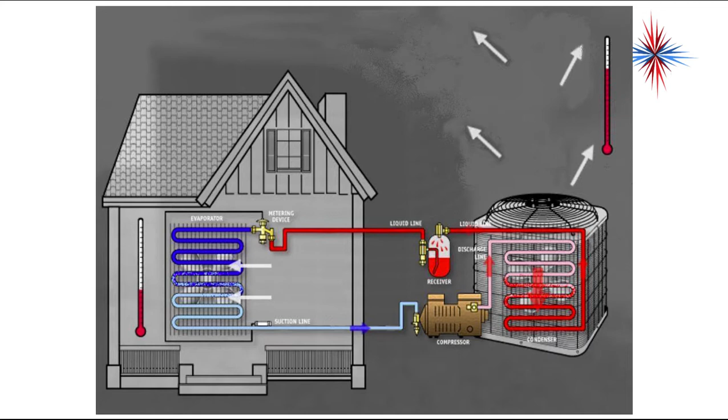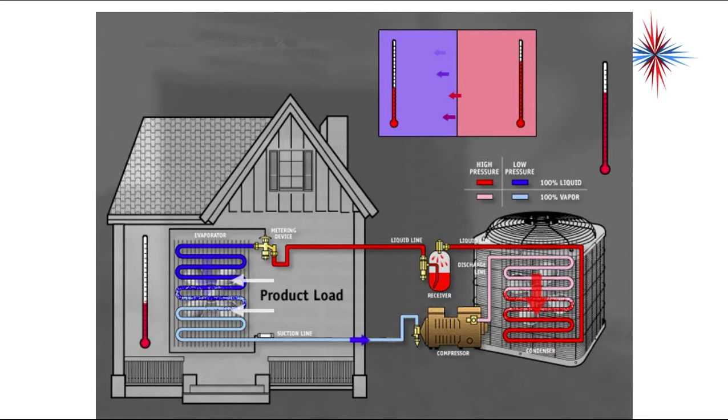This picture shows a split system air conditioning system, but the same principles apply in refrigeration. We have the load from inside the house, and the load out to ambient. In refrigeration, we could have product load in a cooler. Heat always flows naturally from hot to cold. With refrigeration, we're using compressors, temperatures, and pressures to reverse that flow.

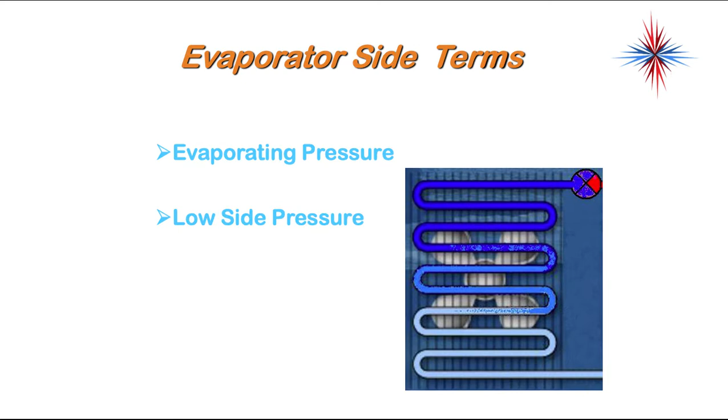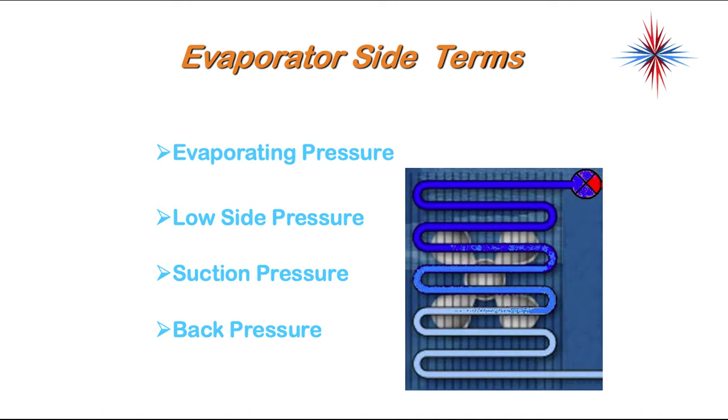On the evaporator, we have evaporating pressure, low side pressure, suction pressure, and back pressure. All 4 of these terms are interchangeable to describe the low pressure side of the system. On the condenser, the high side, we have condensing pressure, head pressure, high side pressure, and discharge pressure. All 4 of those terms could be used to describe the pressures on the high side of the system.

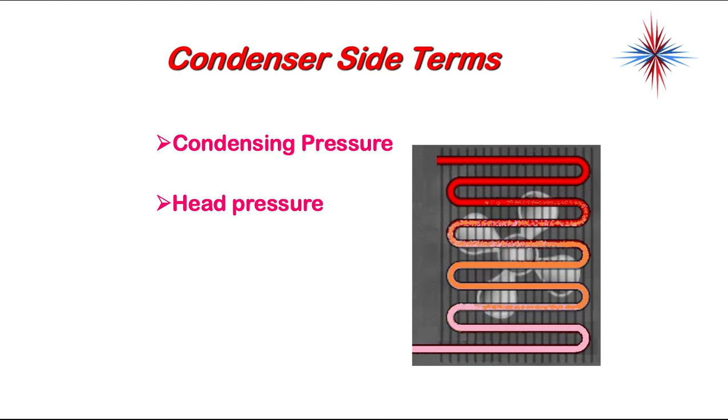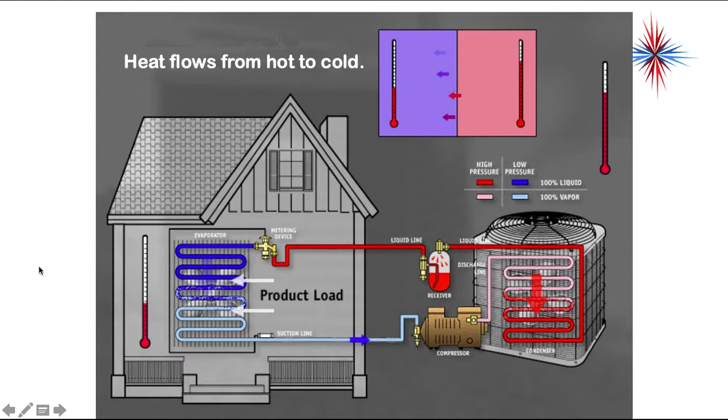Now, it's very important to note that the 2 points of pressure change are the metering device and the compressor. When we're talking about the low side of the system, you can draw an imaginary line between the metering device and the compressor. Everything on the evaporator side, all those pressures should be the same. Everything on the condenser side, all those pressures should be the same. The condenser side is high pressure, the evaporator side is low pressure. No matter where you go in that system, the pressure should be relatively the same.

The compressor is the heart of the system, which circulates the refrigerant. It creates the pressure difference necessary between the low and high side of the system. The compressor raises the pressure and temperature of the refrigerant vapor above the ambient and surrounding temperature. So when we raise that pressure and temperature of the refrigerant above the outside temperature, now the natural flow of heat moves from inside the refrigerant to outside, because heat will always move from high temperatures to lower temperatures. We're raising that refrigerant temperature over the temperature that is outside.

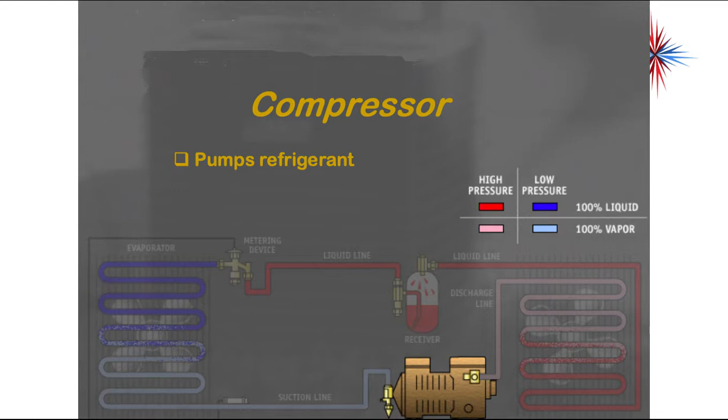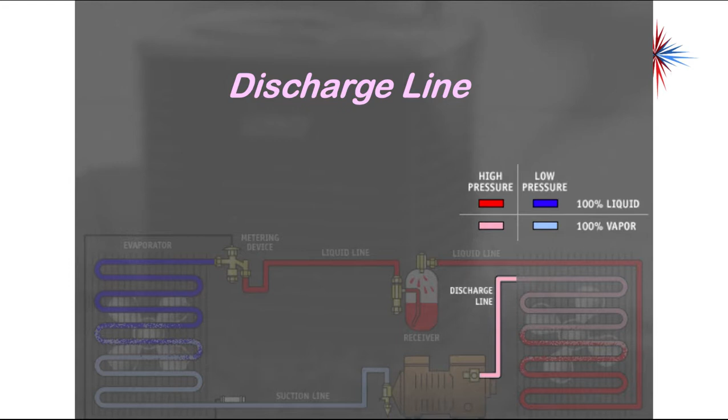Now, compressors are vapor pump only. Liquid refrigerant can damage or disable the compressor. You should never have liquid in a compressor. So again, it pumps vapor refrigerant only and divides the low and the high side. Coming out of the compressor, we have a discharge line. The discharge line is 100% high pressure vapor, and it connects the compressor to the condenser.

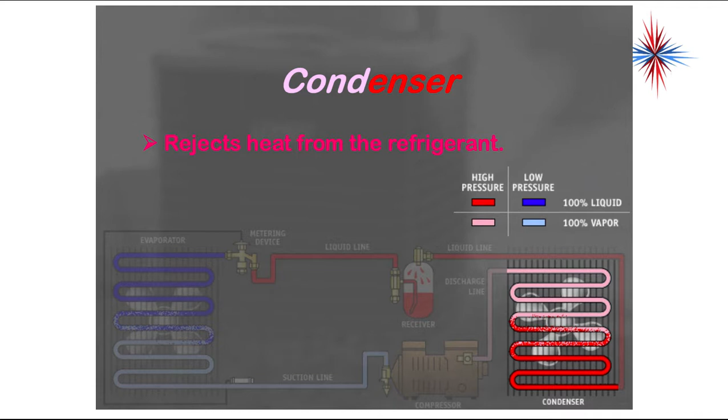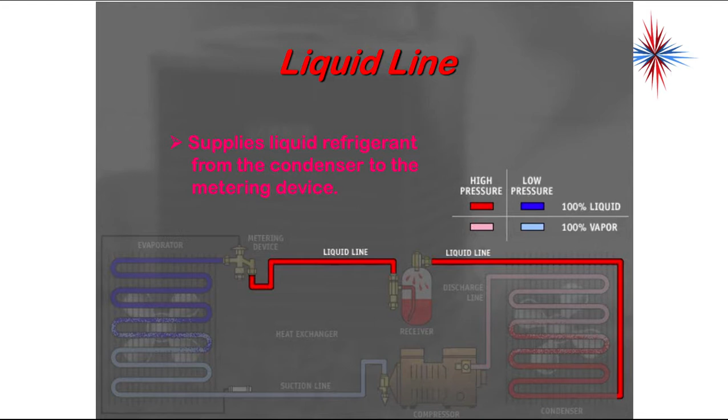The condenser rejects heat from the refrigerant because the temperature and pressures are higher than the temperature of the surrounding outside air. The heat will come out of the refrigerant and be rejected to the outside environment. Out of the condenser, we have the liquid line, which supplies liquid refrigerant from the condenser to the metering device, and it should be liquid. If we're sending anything other than liquid refrigerant to that metering device, we may have a problem someplace in the system. The metering device controls the flow of refrigerant and divides the low and high sides of the system.

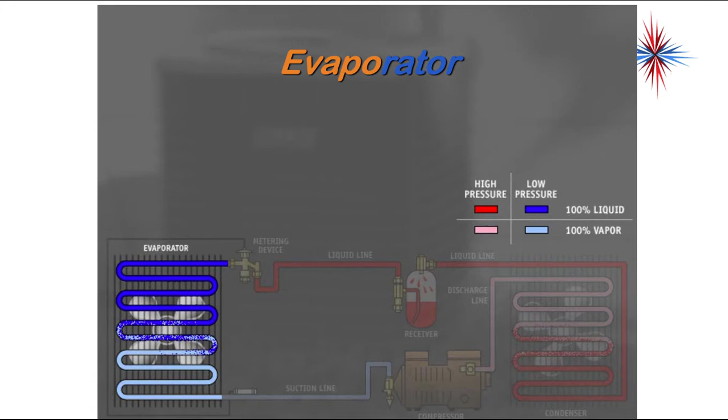So again, this is my second point of pressure change. My first point of pressure change is the compressor. My second point of pressure change is the metering device.

Think of the metering device as you're putting your finger over the end of a garden hose. Everything on the garden hose side is liquid. Everything coming out from the metering device is a low pressure spray. In the trade this is known as flash gas.

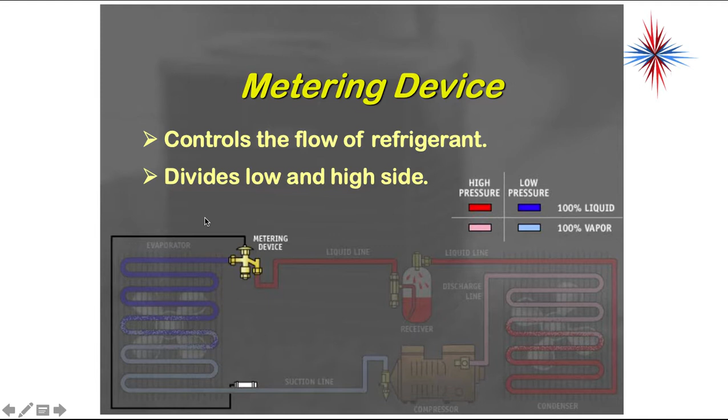So liquid comes into the liquid line. There's something in here, a little pinhole that sometimes varies in diameter, and it sprays a low pressure mist of refrigerant into the evaporator. That's called flash gas. The evaporator absorbs the heat into the refrigerant.

As this low pressure liquid comes into the evaporator, it starts to boil off. It evaporates because the temperature of that is now lower than the surrounding air. So we absorb heat into that because of that low temperature. As it absorbs heat, it boils off and becomes a vapor.

Anytime we boil a substance or a liquid off, it takes a lot of BTUs. It absorbs heat as it boils off, and it leaves the area behind it feeling cooler at a lower sensible temperature.

It removes the moisture from the air as well. Because the evaporator is at a colder temperature than the surrounding air, it does attract moisture. And that is one of the primary principles of air conditioning.

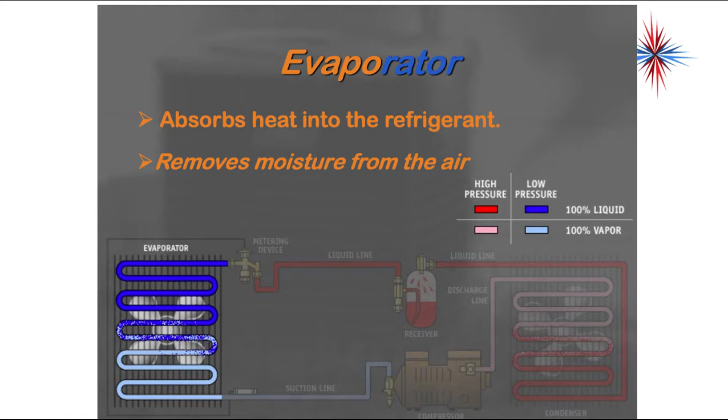It attracts moisture. The suction line connects the evaporator to the compressor. It sucks the vapor out of the evaporator into the compressor, where the cycle starts all over again. The suction line must be a low pressure, superheated vapor from the evaporator, and we'll talk more about that in the future.

There may be other components in the suction line, such as accumulators, crankcase pressure regulator, P-traps, or filters. But these are the basic components of the refrigeration system. Every refrigeration system will have the four basic components: the compressor, the condenser, the evaporator, and the metering device.

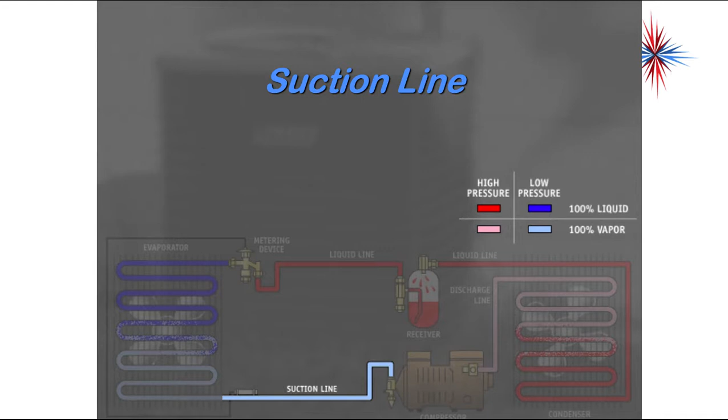The suction line, as I said, returns superheated vapor from the evaporator to the compressor.

Occasionally, you'll have a receiver. Depending on the system design and operating conditions, a system may use a liquid receiver. A receiver is an accessory which stores refrigerant until it's needed for different loads placed on the system. That's sort of like a holding tank in the liquid line.

Once the subcooled liquid exits the condenser, the receiver stores the liquid. The liquid level in the receiver will vary depending on whether the metering device is throttling open or closed. Receivers are used on systems which have modulating types of metering devices, such as thermostatic expansion valves.

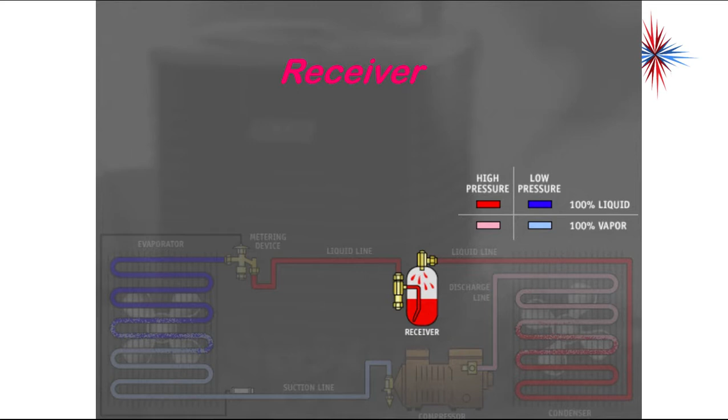Some systems with a receiver may also have a receiver bypass to route the refrigerant directly to the liquid line to maintain head pressure. So the receiver is an accessory that's added to the liquid line to store liquid refrigerant.

The condenser. We're going to talk about temperatures, pressures, and states. The condenser is under high pressure. How high the pressure and temperature of refrigerant will be is determined by the type of refrigerant, condenser efficiency, and design.

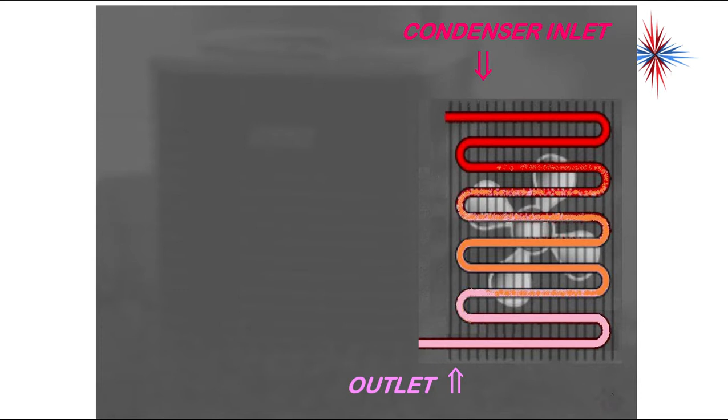The saturation temperature is the only point in the condenser where there's a direct pressure-temperature relationship, which can be plotted on a temperature-pressure chart. On an air-cooled condenser, the saturation temperature is normally 10 to 30 degrees above the ambient temperature. On refrigeration systems with smaller condensers, you will see 35 degrees above the ambient temperature being normal.

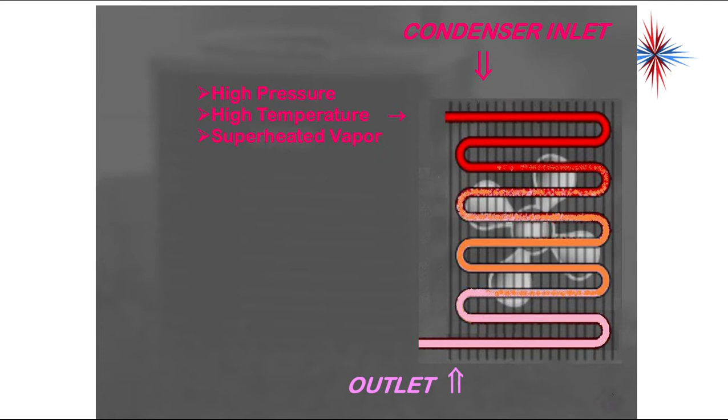It comes into the condenser. Refrigerant comes in as a high pressure, high temperature, superheated vapor, which means the temperature of it is way above the condensing point. As it flows through the condenser, it starts to cool.

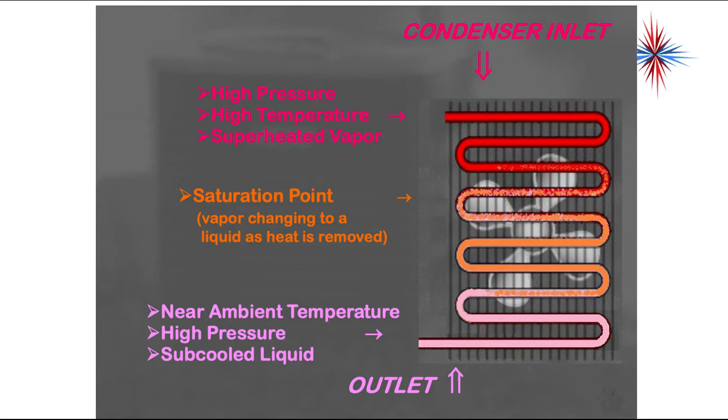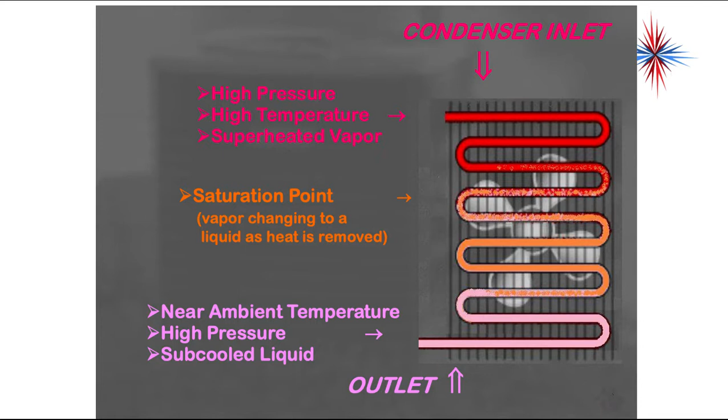It rejects heat. It will reach a saturation point where the vapor is changing to a liquid as heat is further removed. It's condensing. Once the refrigerant leaves the condenser at the condenser outlet, it's near ambient temperature, it's high pressure, subcooled liquid. In other words, the temperature has dropped below the saturation point.

The evaporator also has temperatures, pressures, and states that we need to talk about. The evaporator is under low pressure. Again, how low the pressure and temperature refrigerant will be is determined by the application and the design.

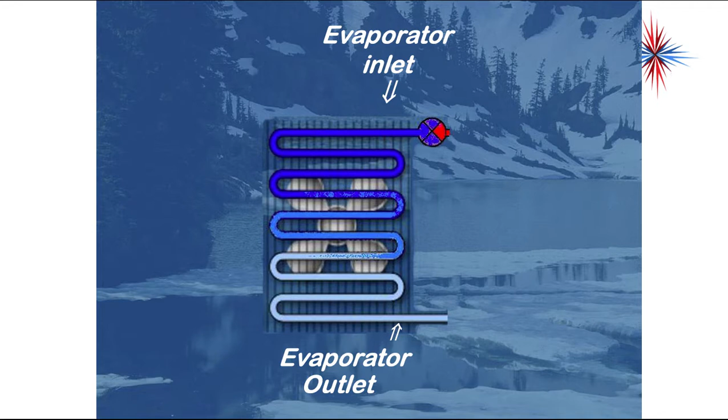The saturation temperature is the only point in the evaporator where there's a direct temperature-pressure relationship, which can be plotted on a pressure-temperature chart. A low pressure, low temperature, about 80% liquid, 20% vapor, we call it flash gas, comes out of the metering device into the evaporator inlet.

About halfway through the evaporator, and sometimes a little more, we have saturated vapor, the point at which liquid charge is changing to a vapor. In other words, it's boiling off. When we get to the evaporator outlet, we have a low pressure, low temperature, superheated vapor. By superheated, we mean that between the point of saturation and the point of discharge from the evaporator, we are still adding heat. We're still absorbing heat into the system.

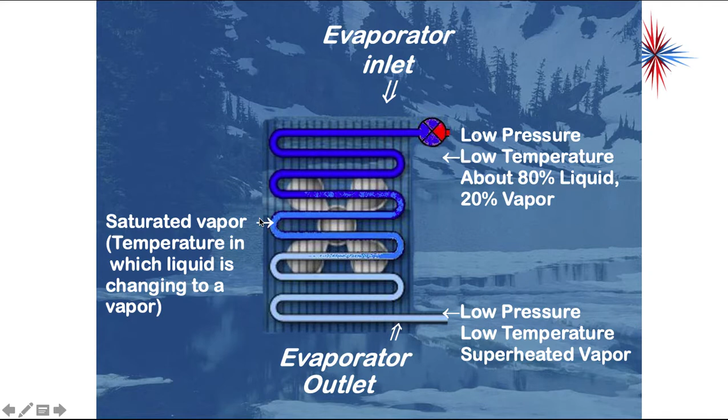So if my saturation point is 34 degrees, I could have 42 degrees at my evaporator outlet, because I want to have between 8 and 12 degrees superheat. So the superheat is just the difference between my evaporator outlet temperature and the temperature of my saturation point. We're going to talk more about that, but it's important.

Now let's talk quickly about subcooling and superheat. The amount of liquid subcooling affects system capacity as well as the effectiveness and capacity of expansion type metering devices, basically TXV and AEV.

Subcooling is defined as the difference between the measured liquid temperature and the liquid saturation temperature at a given pressure. Liquid subcooling occurs from the start of the 100% saturated liquid point in a condenser and may continue all the way to the metering device. Saturated liquid temperature can be obtained from a pressure-temperature relation chart using condenser pressure.

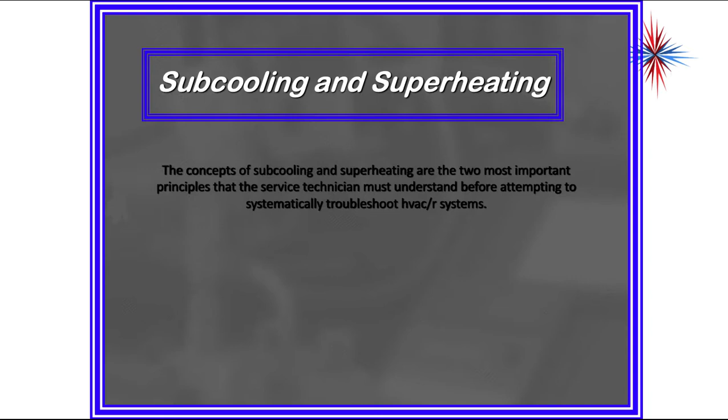The concepts of subcooling and superheat are the two most important principles that the service technician has to understand before attempting to troubleshoot an HVAC system. So let's talk about this.

We're going to talk about condenser subcooling. Condenser subcooling is the additional cooling of liquid in the condenser below the saturation point. It is measured by subtracting the actual condenser liquid outlet temperature from the saturation temperature measured in the condenser, in other words, your gauge pressure converted to temperature. If the pressure drops in the system, the pressure must be measured where the temperature was taken.

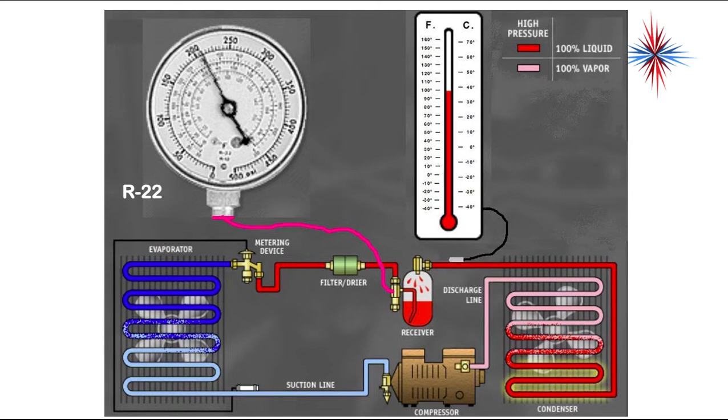Subcooling is needed to prevent liquid line flash. In other words, we do not want bubbles or vapor in the liquid line. Condenser subcooling ensures that there's a liquid seal at the bottom so the liquid line or receiver is never fed with vapor.

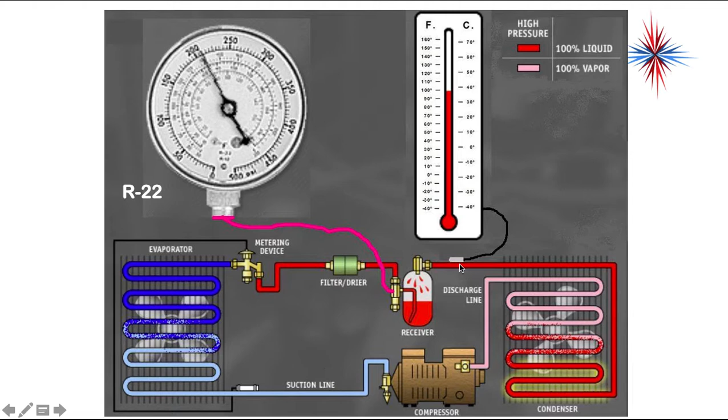So this is an R22 system. We have a little over 200 psi, which converts, we'll talk about the conversion in the next slide. So we're taking our pressure on the high side, and our temperature on the liquid line as it comes out of the condenser. That's condenser subcooling. 210 psi equals 105 degrees, which is our saturation point. Our liquid line, we're measuring right at 100 degrees. So our subcooling is 5 degrees Fahrenheit.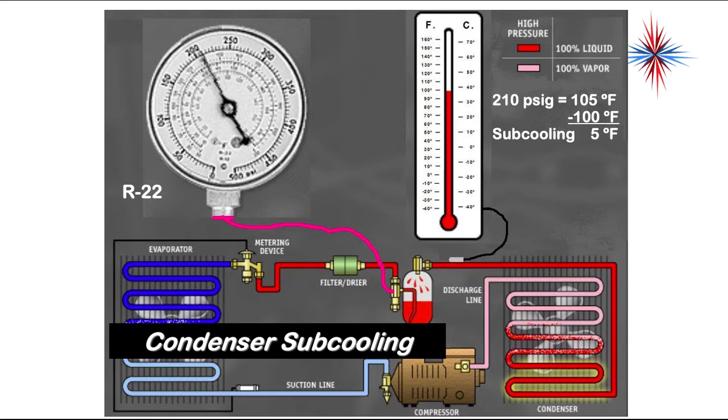Is that right or wrong? We really don't know on newer systems. We have to look at the manufacturer specification.

So total subcooling, we go over closer to the metering device. We have 210 psi, that doesn't change. My pressures don't change throughout the entire high side, but my temperature may actually change the further down toward the metering device I go. So in this case, 210 psi, 105 degrees, my liquid line is 95 degrees, so I now have a 10 degree subcooling.

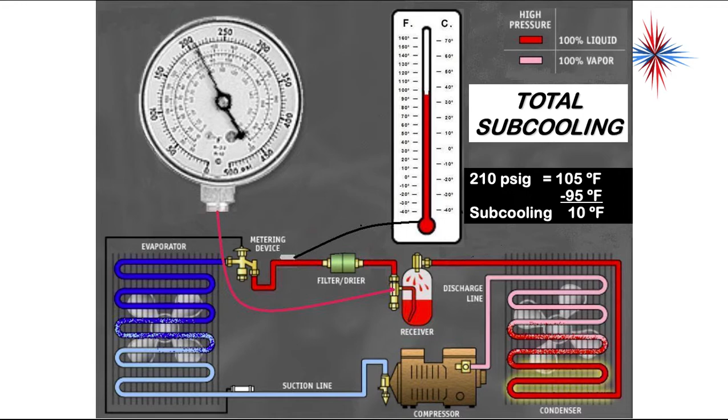Superheat is any heat added to a completely saturated vapor that results in a rise in temperature, a sensible heat change of the gas. Superheat tells me what's happening in the evaporator.

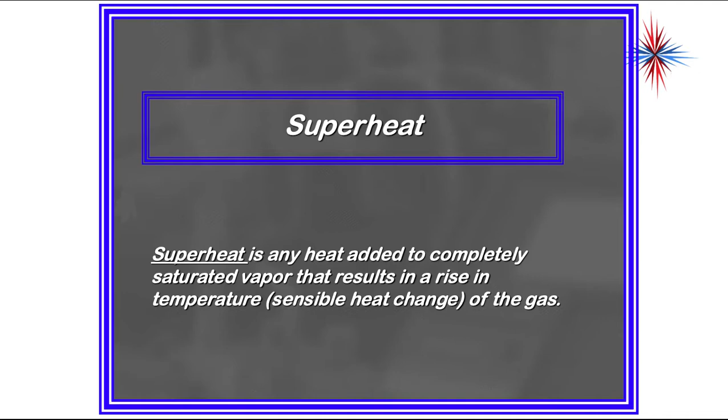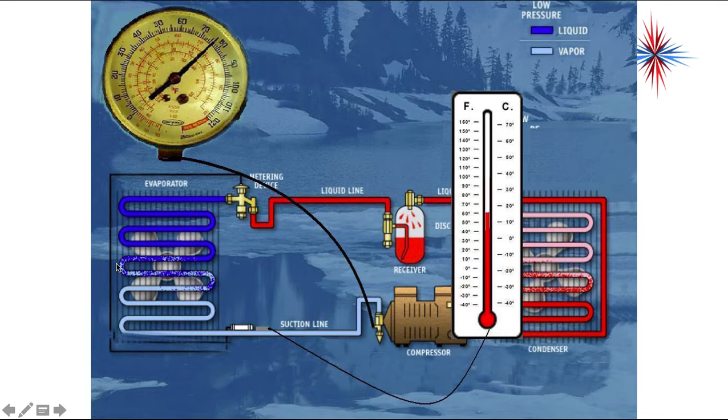So once again, I'm going to use my pressure gauge. In this case, I'm going to use a low side pressure gauge because I want the pressure of the saturation point, which is happening in my evaporator. The low side pressure gauge, no matter where it's connected on the low side of the system, tells me what is happening in the evaporator. The pressure tells me the actual temperature of the evaporator, of the saturation.

So we're talking evaporator superheat. You take your temperature as close as you can to the sensing bulb or the outlet of the evaporator. So if my gauge is showing me 76 psi, that converts to a 45 degree saturation point. If my temperature is 60 degrees, I take 60 minus 45, and I now have a 15 degree evaporator superheat. That's a little higher than I'd like it to be. I'd like it to be between 8 and 12.

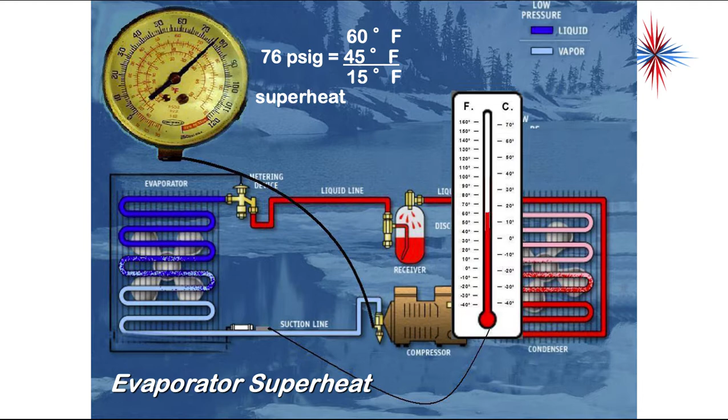Total superheat can be taken at where the suction line is closest to the compressor. This is what we normally use when we deal with system service. Okay, total superheat. So again...

My suction line temperature is 60 degrees. My system pressure is 76 on the low side, which equals 45 degree Fahrenheit. So my superheat is 15 degrees. Again, that's a little bit higher than I'd like it to be.

There's different types of metering devices. We have capillary tubes, we have automatic expansion valves (AEVs), we have fixed bore, and we have thermostatic expansion valves. As systems become more and more efficient, we're seeing more and more of a change to the thermostatic expansion valves. Small systems like window air conditioning systems will have the cap tubes. AEVs are used in some refrigeration systems, and fixed bore is used pretty often in residential and light commercial air conditioning and heat pumps.

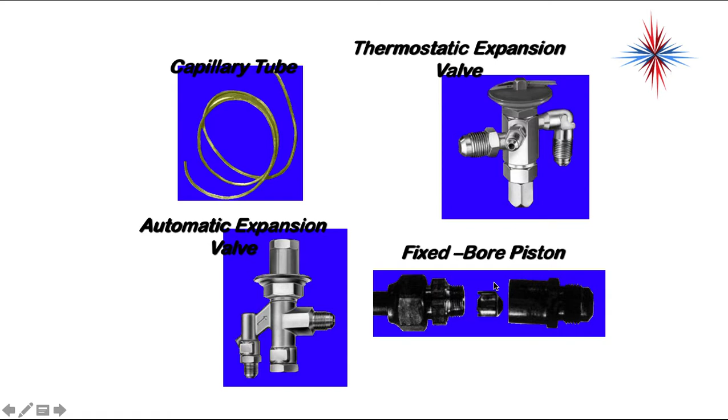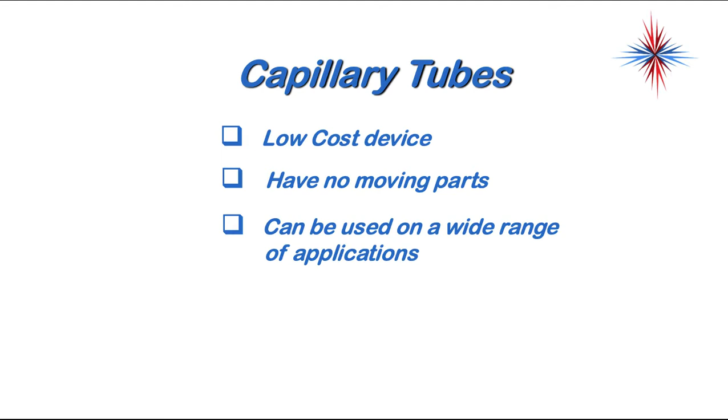So cap tubes are low-cost devices, have no moving parts, and can be used on a wide range of applications. Thermostatic expansion valves are the most efficient. They maintain a constant evaporator superheat, and they help prevent compressor flooding.

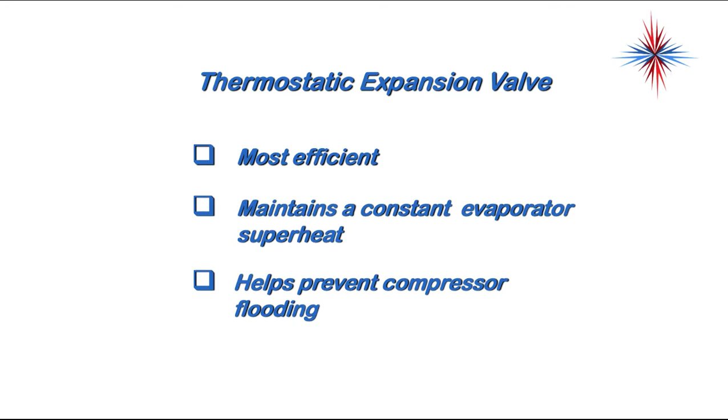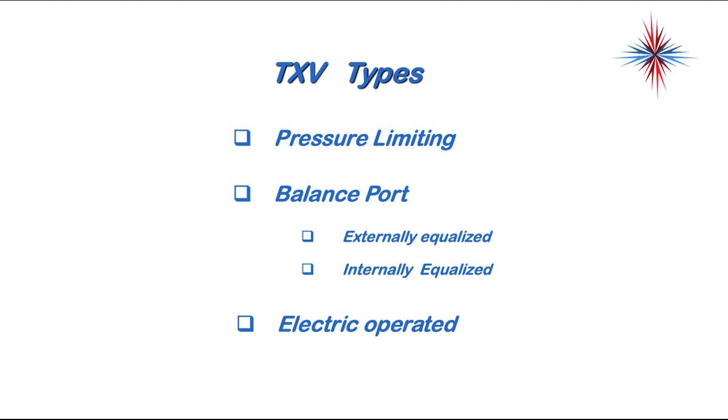TXV types could be pressure limiting, balance port, so they're externally equalized, and we'll talk more about that. They could be internally equalized, and they could be electric operated. Electric operated are by far the most efficient, but since you pay for what you get, they're by far the most expensive.

TXVs have bulbs, okay? They have a bulb that has to be placed on the suction line. You cannot place it any place from the 3 o'clock through the 9 o'clock position. They cannot be on the bottom of a suction line because the bottom of the suction line contains oil.

Okay, vertical installation, the pilot tube must be up, but it's not recommended. You cannot place it on a vertical pipe with the tube coming out of the sensing bulb down. The actual charge will drop from inside the bulb.

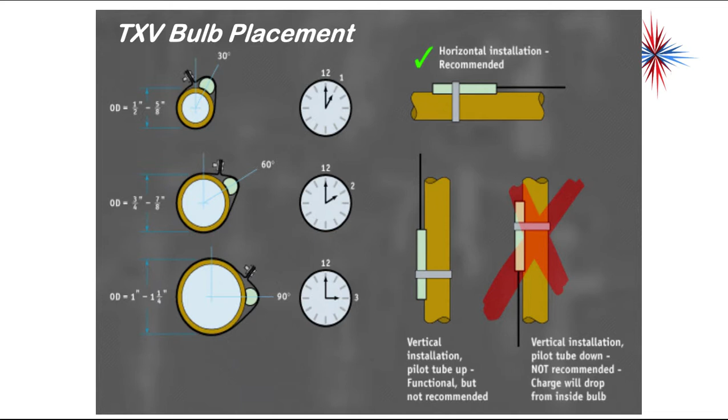Okay, you want your TXV equalizer to be as close to the evaporator outlet as possible, but it must be on the evaporator side of a balancing port. In a lot of larger evaporators, multi-pass evaporators, we have an extra line that connects into the suction line. That's called a balancing port.

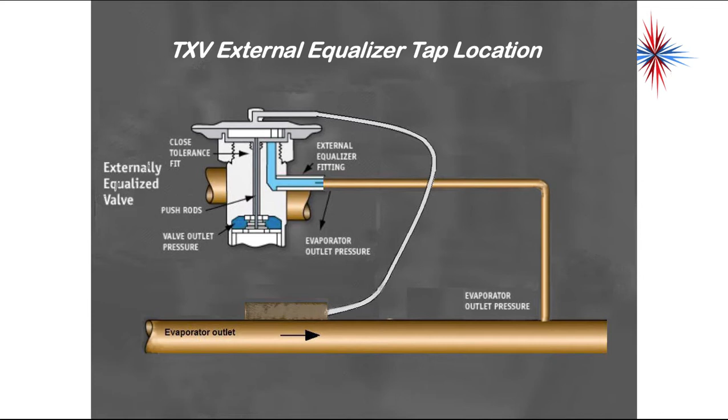Automatic expansion valves maintain a constant evaporator pressure. They're used in small systems which have constant loads.

Fixed bore metering devices are the most common on the residential systems. They are a dual purpose device. It works as a metering device and it works as a check valve. They're considered critical charge. In other words, we weigh that charge into those systems.

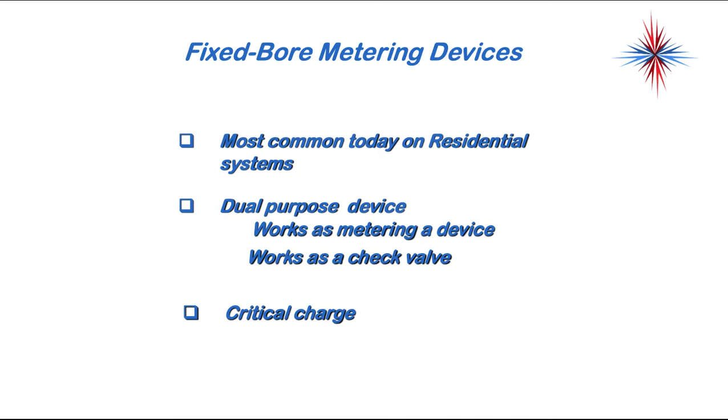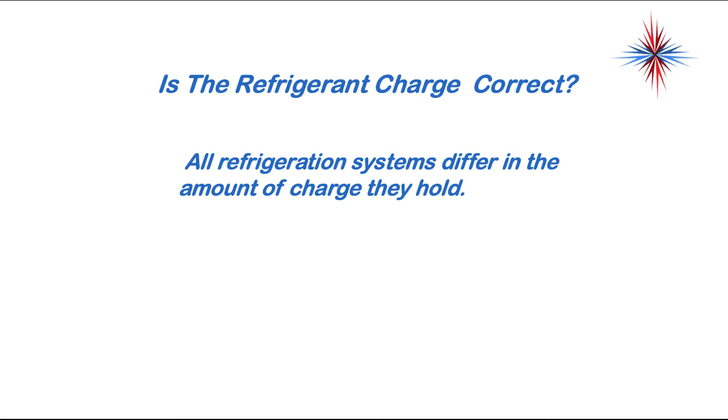So, how do we know if a refrigerant charge is correct? Okay, all refrigeration systems differ in the amount of charge they hold. There's different amounts of line set, there's different purposes, and there's different conditions they operate in. There are guidelines and charts and techniques to follow for charging and verifying charge.

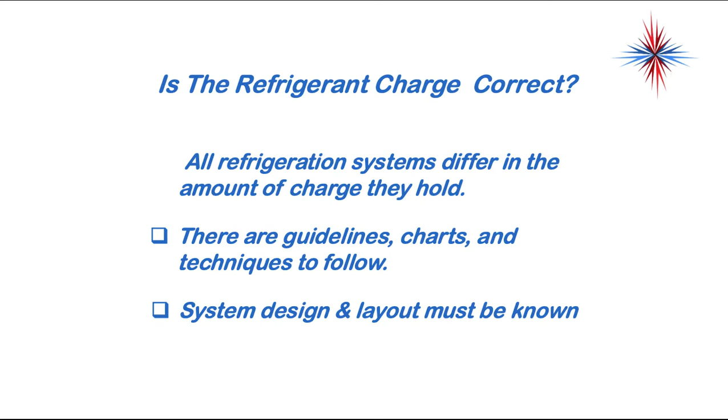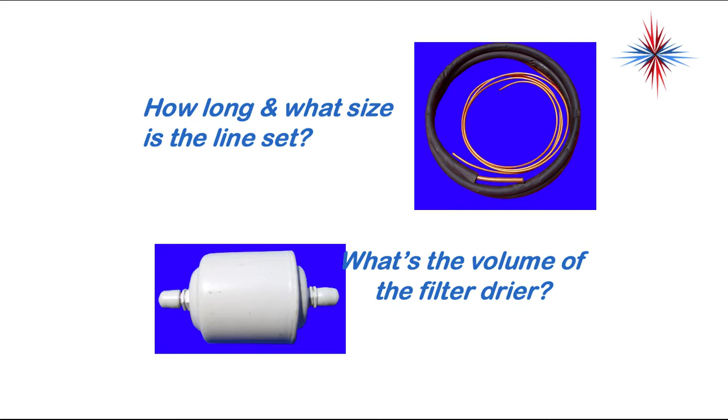System design and layout must be known. How long and what size of line set? What's the volume of the filter drier? All of these things can actually mess up a charge. If you change a filter dryer with a larger size filter dryer, which happens occasionally, your required charge may change because the volume of that filter dryer may change.

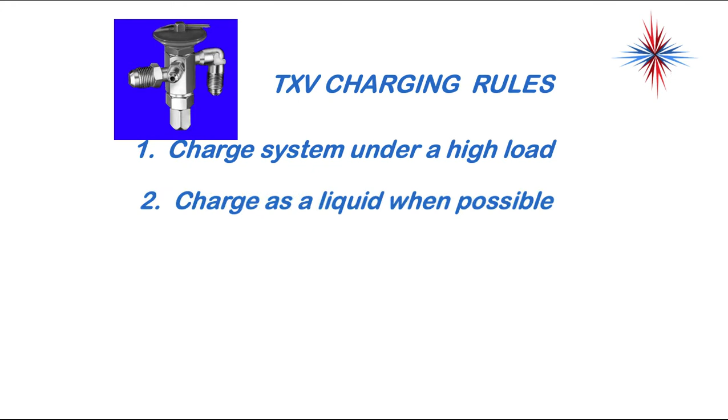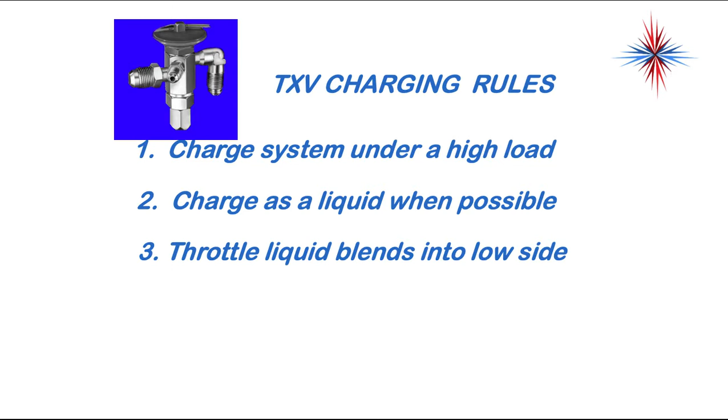So if the system has a TXV, you have to charge the system under a high load. In other words, charge it for the extreme conditions it's meant to charge for. Charge as a liquid when possible. Throttle liquid blends into the low side. If it's a blend, do not charge it as a vapor because you do not know the components of the refrigerants that are going to go in there. Record evaporator and compressor superheat and condenser subcooling.

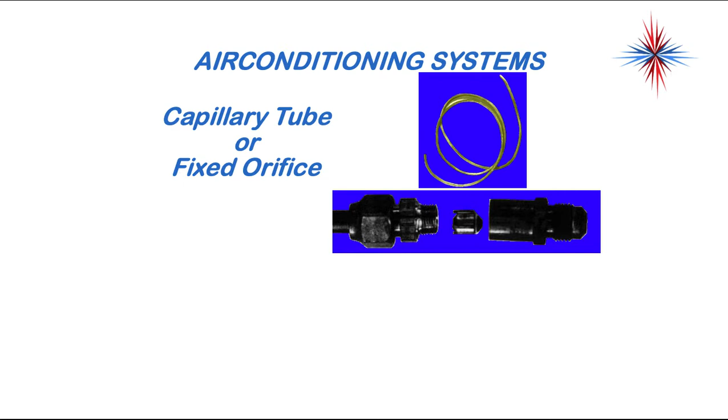Cap tube or fixed orifice air conditioning systems: weigh in the correct charge. Use the manufacturer's charging charts. There will be charts on the equipment. On air conditioning and heat pumps, this is usually right inside the wiring cover. You might have to go to a manufacturer website, but you have to weigh in the correct charge.

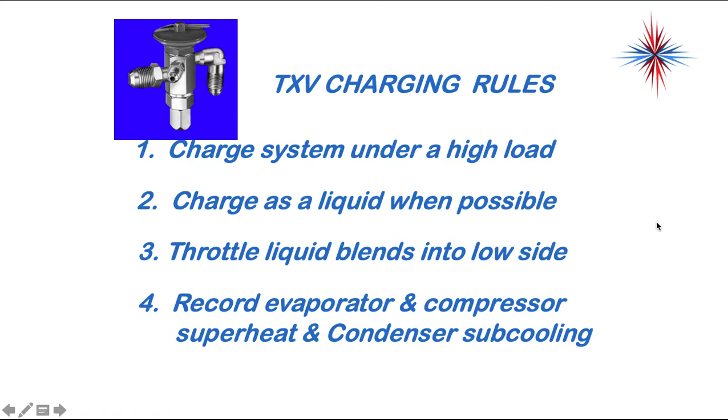You always want to use system superheat method to verify the charge. Okay, so for TXVs and AEVs, okay, we're using basically subcooling. Okay, superheat should be constant. Okay, you want to record it just to verify. But for cap tubes and fixed bore, we are always using superheat method. Okay, system superheat.

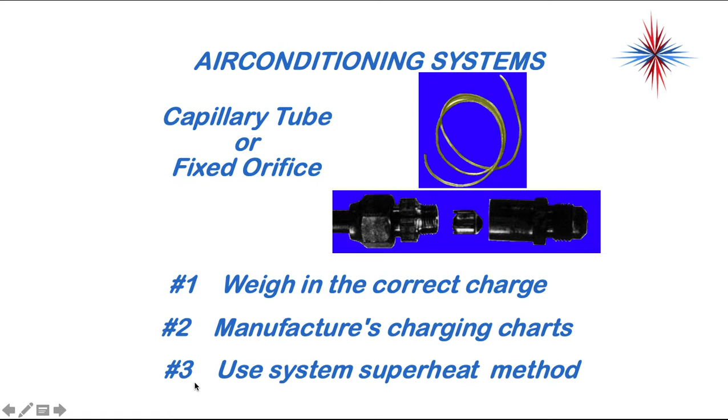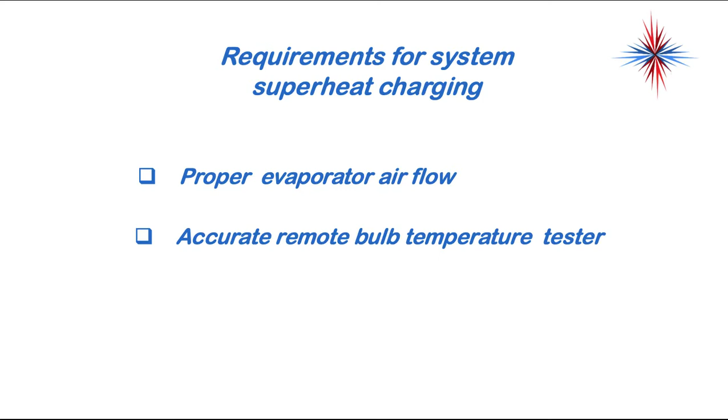Okay, requirements for system superheat charging: proper evaporator airflow, accurate remote bulb tester, and accurate gauge manifold set.

So basically, we use the indoor wet bulb temperature around the evaporator, and we use the condenser entering air temperature, and then use a chart that tells us what the superheat should be. For example, if I have an indoor wet bulb temperature of 64 degrees and a condenser ambient temperature of 80 degrees, I should have a superheat of 15 degrees.

To increase superheat, remove refrigerant. To decrease superheat, add refrigerant.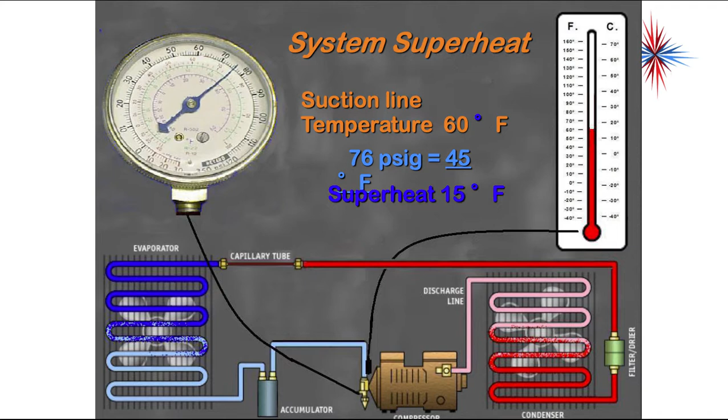Airflow can be measured in many ways: equipment data charts, airflow meters, or a combination of meter readings and formulas. There's a thing called a sensible heat formula that you'll have to use all the way through this trade.

CFM is cubic feet per minute, a measurement of airflow. So if we take our sensible heat BTUs and divide it by 1.08 times the temperature difference, we can calculate how much airflow.

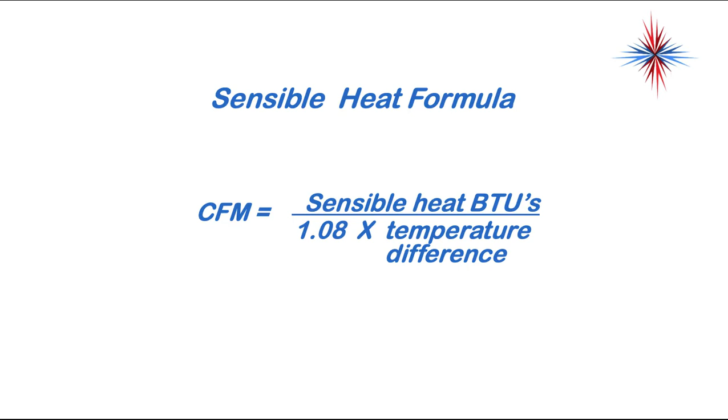BTUs equals heater amps times volts times 3.41. This is for electric heat. Three-phase would be heater amps times volts times 3.41 times 1.73. That tells us sensible heat BTUs for electric heat.

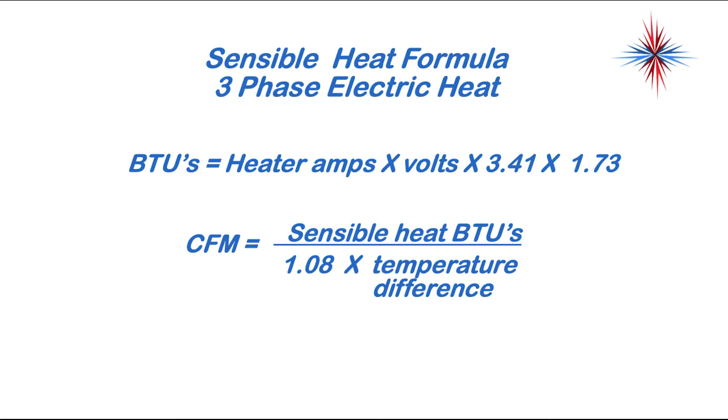For fossil fuel, it's a little different: BTUs is heater input times efficiency, or bonnet capacity. This isn't really required for refrigeration, but this formula you really need to know if you're going into this trade.

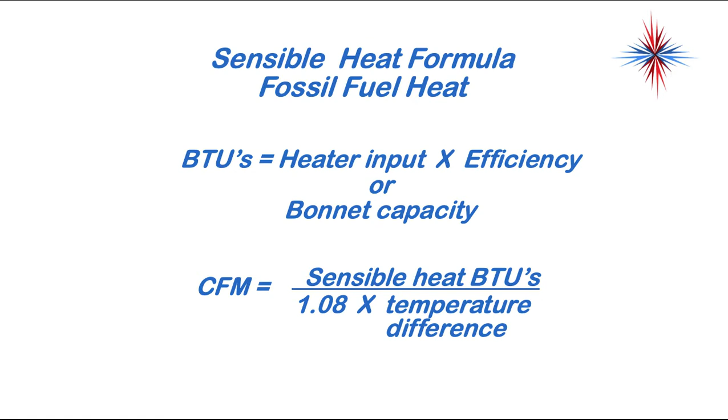When you measure airflow, you measure with a tool and take multiple readings all the way through, then average it out.

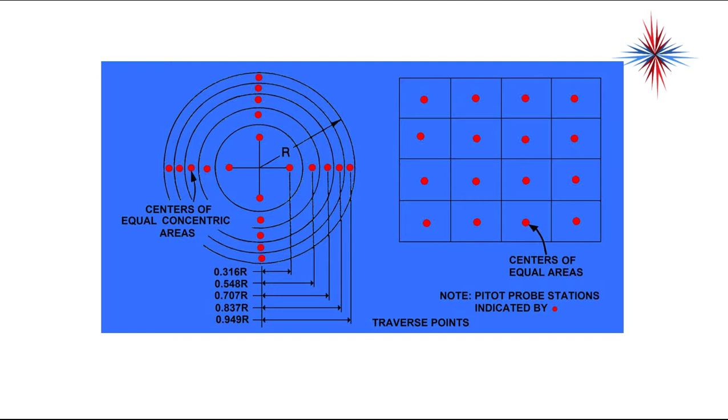Some sample questions you might come across on testing or certification: the high and low pressure points in a refrigeration system are separated by what? The correct answer is A and C — the compressor and the metering device are my points of pressure change.

Subcooling can be defined as: the cooling effect of an evaporator, any sensible heat removed from 100% saturated liquid, the superheat removed at the top of the condenser, or the cooling of the compressor motor by returning refrigerant. The correct answer is B, any sensible heat removed from 100% saturated liquid.

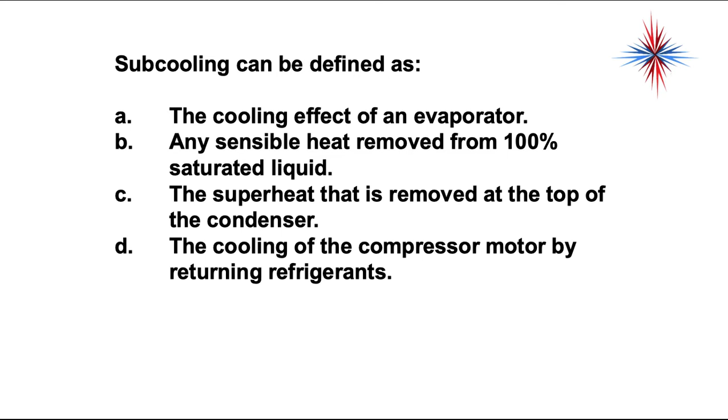High load condition. By the way, we're not going to charge using the sight glass — you're going to charge using subcooling.

Superheat is defined as: the heat added to the saturated liquid, heat removed from the saturated liquid in the condenser, heat added to the saturated vapor exiting the evaporator, or heat removed from the saturated vapor exiting the evaporator. The correct answer is C, the heat added to the saturated vapor exiting the evaporator.

So this is a long, drawn-out example of the components, the charging requirements, and how to troubleshoot the refrigeration side of a system. We're going to talk much more about the troubleshooting, but these are important basic procedures.